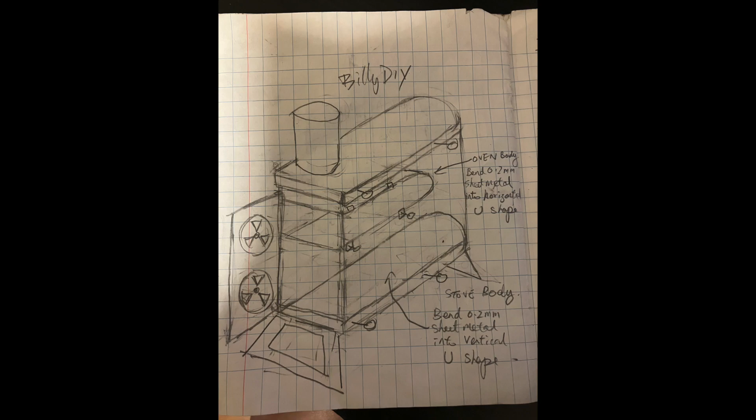The beauty of this design is that the top oven is also the buffer. So the hot air generated out of the combustion chamber rises up at the back of the top oven and then passes through the crack between the top surface of the top oven and the top of the stove. That way it can heat up the top oven. So the top oven will sustain the temperature of 350 degrees for a long time.

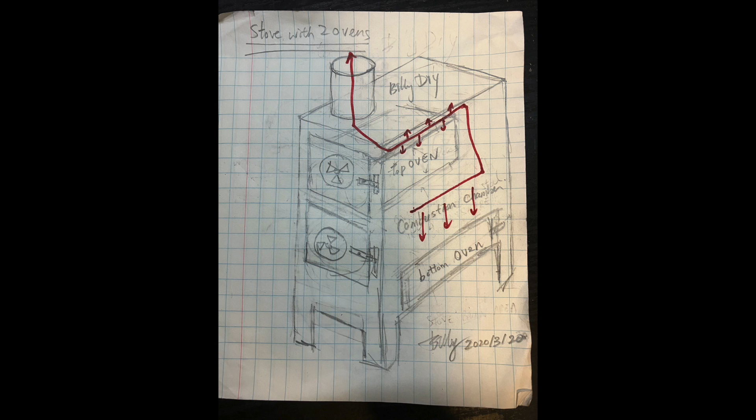Whereas for the bottom oven, you only get a one-way pass of heat energy from the combustion chamber downwards to the bottom oven, and that heat transfer is not very efficient. So the max temperature you are going to get is 150 degrees Celsius. It will be good for cooking or heating up food that doesn't need a high temperature. If you find the top oven's temperature too high, you can always open the oven door or the wind gate to let the hot air out a bit, so you can reduce the temperature down to 200 degrees Celsius.

In my video series, I'm going to show you how to build from the simplest stove with only 6 pieces, like the one shown on the screen, that are connected together through hinges, slits and tracks, and it will be very easy to make. You just need to bend some metal sheets and hook them up. Once we finish that, we can add more details to the first stove by adding the wind gate, the circular wind gate, as well as adding a window so we can see through the oven.

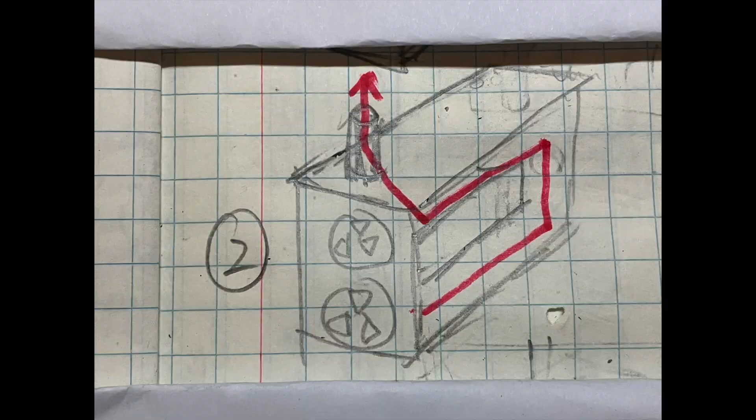We'll also add a piece of U-shaped metal to the top of the stove to form the top oven, which in itself is also a buffer for the stove. The third design is to add the legs to the stove and oven, and the legs themselves are also created using the metal sheets. And by combining the metal sheets and putting a bottom, the bottom oven is created.

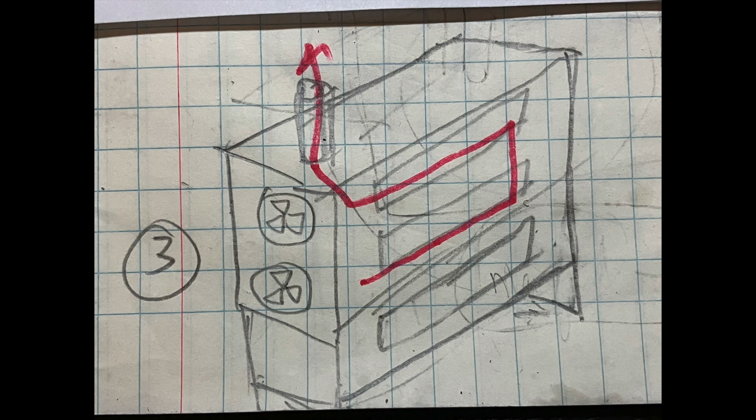Next, let's look at the layout of the metal sheets. So this is the oil can that you can find on the street. Measure 240 times 240 times 350 millimeter. You can use that and cut it down into 6 pieces and use those metal sheets to create your stove and oven.

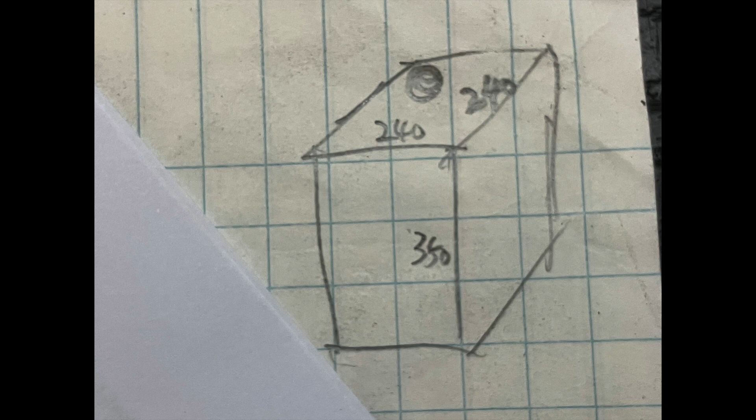Next, we need to create a model for your stove. So you have this model of a general stove with the chimney at the back without buffer, with a small wind gate in front. It's measured in the height value of 205. I put a name of H there. And then for the width, W is 175. For the length, L is 305. So this is just my value. You can substitute your own value to design your own stove.

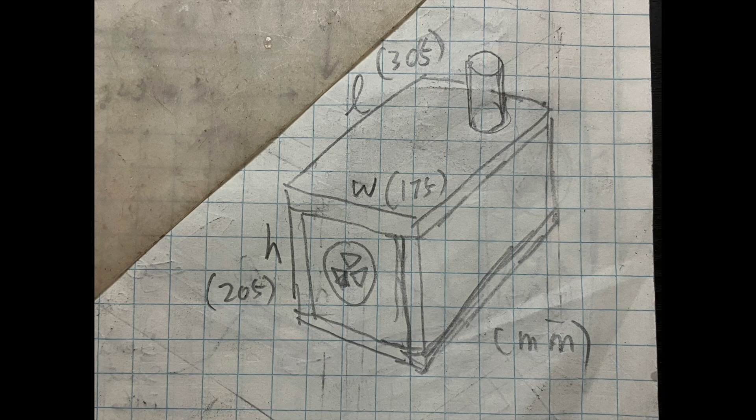This is how you can lay out your material for cutting. So we need 2 pieces for the top and the bottom. The length is L plus 40 millimeter. Width is W plus 40 millimeter. The additional 40 millimeter divided into 20 millimeter on each side will be used to bend into a hinge.

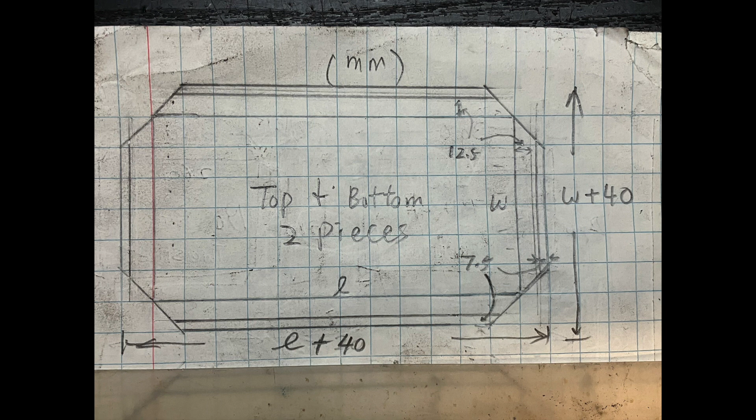So it will be divided into 2 parts. The first part is the outer part, which is 7.5 millimeter, bent 180 degrees. And then there's another part, 12.5 millimeter, which is bent 90 degrees to form a hinge.

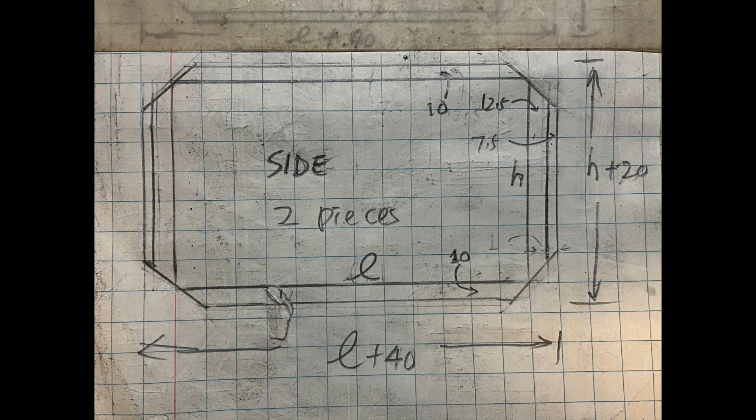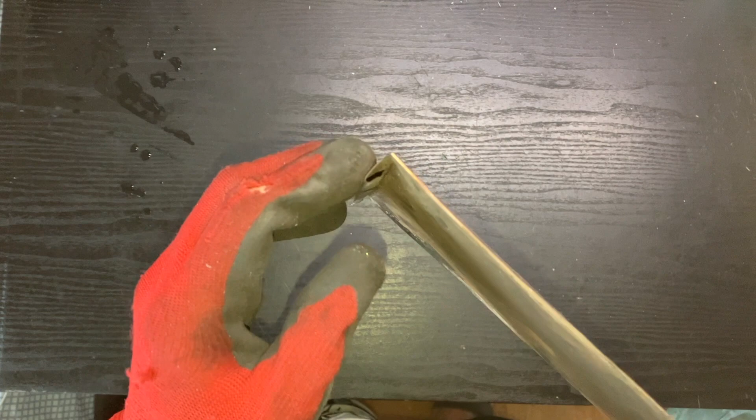The second type of layout is for the 2 sides. So L plus 40 is the length, H plus 20 is the height. For the length, it's the same as the previous layout. It's for a double bend at the front and the back. For the height, we need extra 20 millimeter more, 10 millimeter at the top, 10 millimeter at the bottom. It will be a simple one-way fold, 180 degree.

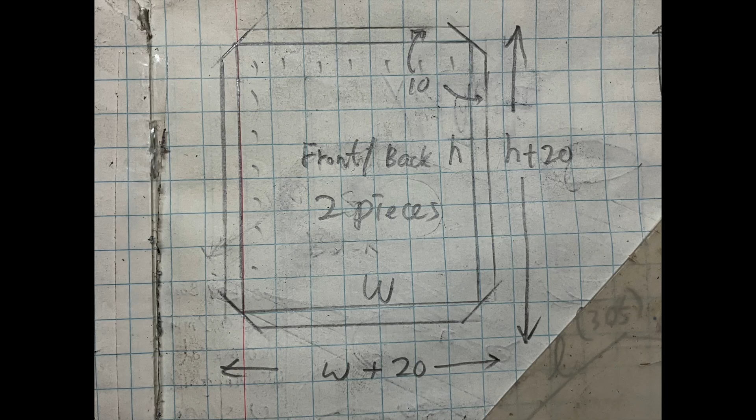The third layout is the front and the back of the stove. So it's W plus 20 millimeter and H plus 20 millimeter. It's a simple one-way fold at all 4 sides with an edge of 10 millimeter. Let's fold them 180 degree.

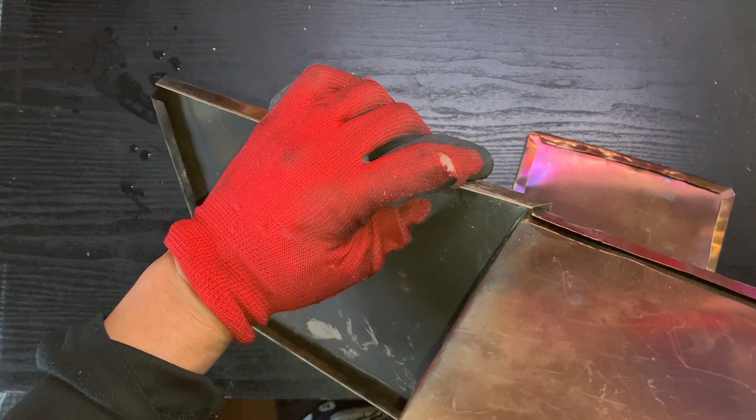Once you made all 3 types of modules or layout, you can bend your metal and slide them together to lock them in. Let me show you how. So this is the track and slit. You just push it in and then it will be locked down.

Okay, then we put in the back of the stove using another joint. So this is a one-way fold, slide into the 2-way fold there. Just push it in and it will be locked down. Once all 6 pieces are locked down like that, you have a good stove.

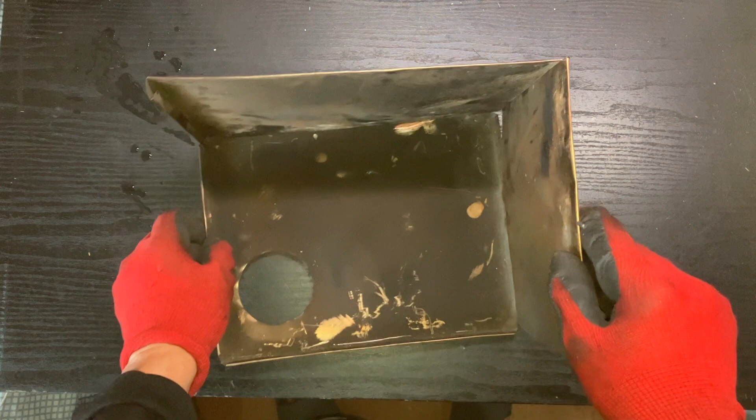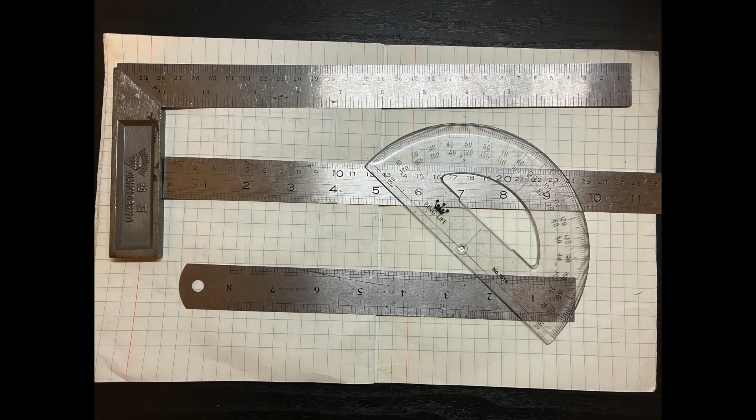Next, let's talk about the tools. We are going to use a lot of measurement tools. These rulers, they are steel rulers, so it will be easier to draw lines using a sharp edge or a pen. And you have a protractor to measure the angle when you need to divide the wind gauge into 3 pieces within the circle. Then we have the compass to draw the circle for the wind gauge and pinpoint the center of the circle for drilling and securing the wind gauge.

And you have the pen and pencil and also the puncher to draw lines. I prefer to use the puncher because I can draw very narrow and sharp lines, easy for cutting the pieces and bending. You have the sheet metal cutter or scissor, and you can cut the sheet metal. Next, we have the clamps, 2 types of clamps to help you fold your metal and bend your metal and to cut the wires.

Or if you want to make a lot of stoves or want to make the stove faster, you can create this sheet metal bending machine. I will create another video to show you how to create it. It's basically made out of 3mm aluminum metal and also the wood and hinges.

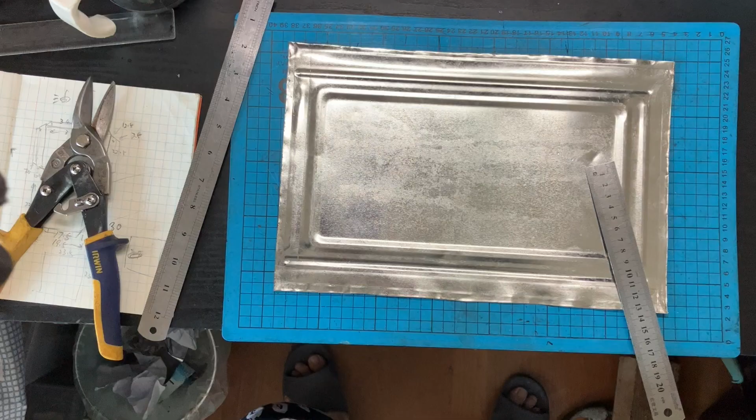That's the end of my first video, the first lesson. In the next lesson, we'll talk about how to start cutting your metals and bending it.